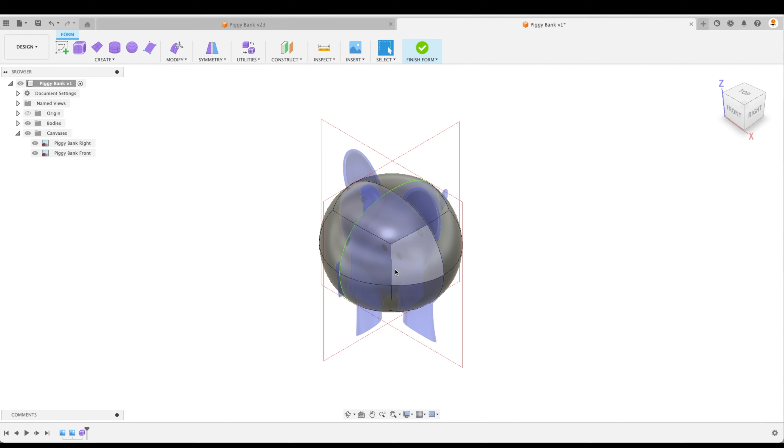Now, what's the next thing we're going to create? Well, we have an option. We could do the ears, we could do the eyes, we could do the feet. Why don't we do the feet first of all?

Now, as we look at the feet, if we go back to our original model, if we create one foot, we could actually mirror it over to the other side and then take those two front feet and mirror them to the back side of the piggy bank. So in reality, we only need to create one foot and all the other three will be created, or the pattern will be followed from that first foot.

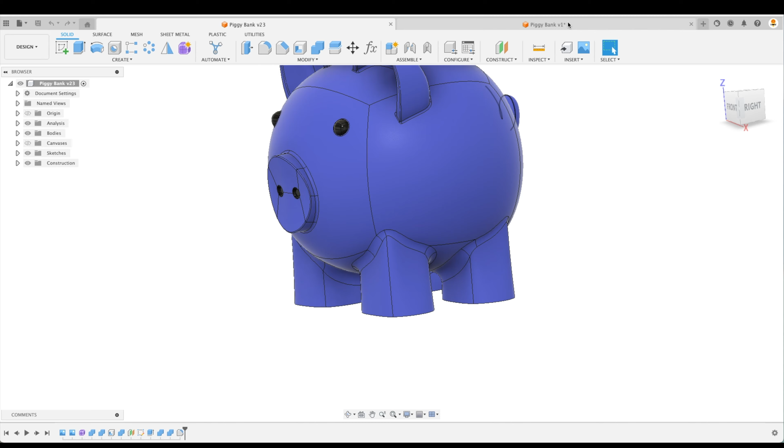So let's do that. For this, I'm going to go to the right face. As you can see here, our image was taken using a perspective shot rather than an orthographic shot. That's why the left legs are lower than the right legs. So we have to use our power of reason here, that when we're creating, things might not always line up, but we have to reason on what we're going to line up our forms with, and why. That takes a little bit of experience, but also a little bit of a thought process. Not too much - you don't have to overly think about it. Try and comprehend that our pictures or images might not always be perfect.

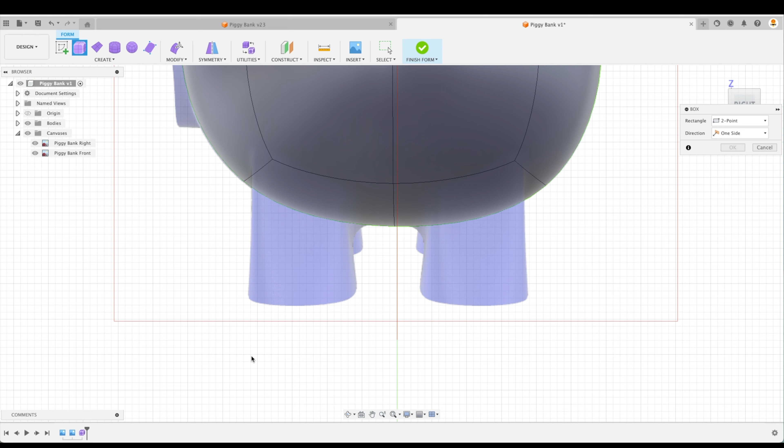So let's create our box. What I'll do here, you can create it on center or 2-point. Let's do 2-point. I'll select the bottom here and then move it up. And we're actually going to bring the box all the way up into the inside of our piggy bank. And there we have it.

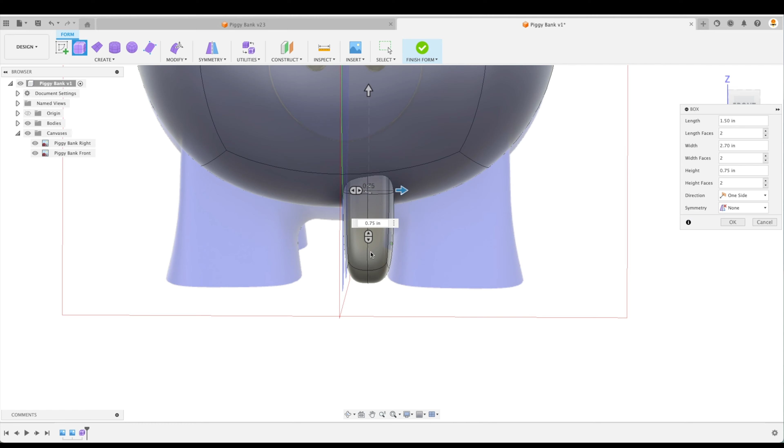Now let's keep our foot there and we're going to rotate our view cube. You can see that our foot is at the center point, or kind of at the center point of our model, where we want to move it over to the right. That's fine. Let's go OK.

Again, we can double click, right click, edit form, and we can move this into position. And then we can scale it in our X direction. So we're just going to scale it until it gets approximately in the right location. And there we have it.

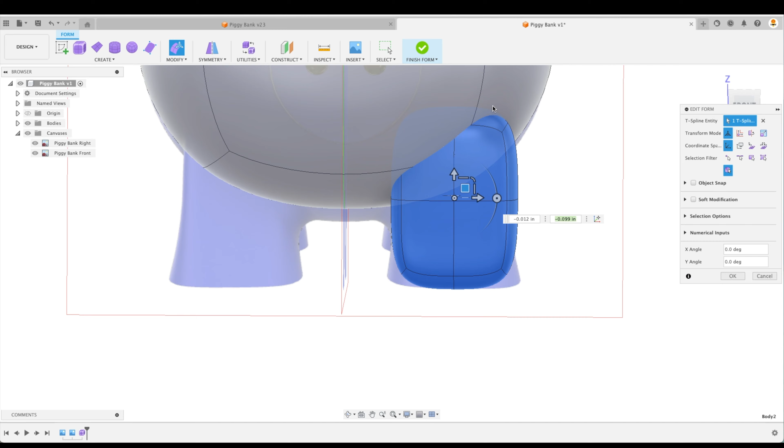Now I'd probably scale this up a little bit more in Z. There we have it. So now when we look at either our right view or our front view, that one leg is approximately in the right location. I'll bring it down a little bit too. So there we go. Okay.

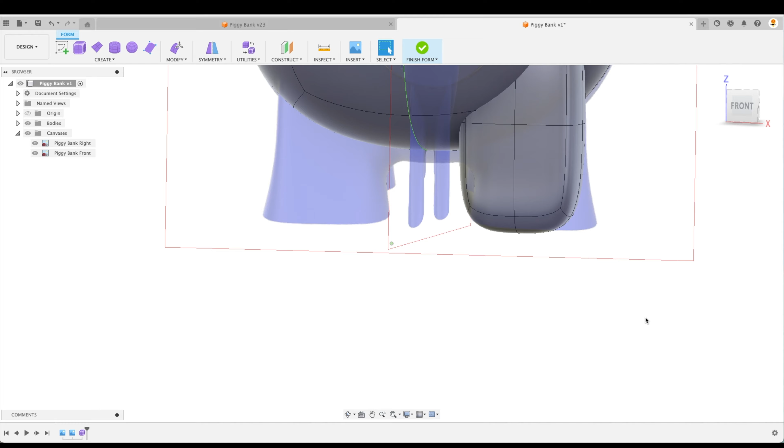Now, at this point, we're going to slowly manipulate it so that it looks like the basic shape of our foot. The first thing I notice is the shape of our feet - they're more square. This is for 3D printing. Obviously, if we're going to print it on a 3D printer, we don't want it to have a round bottom here, because it just becomes more difficult on our 3D printer. So let's try and square this off a little bit more.

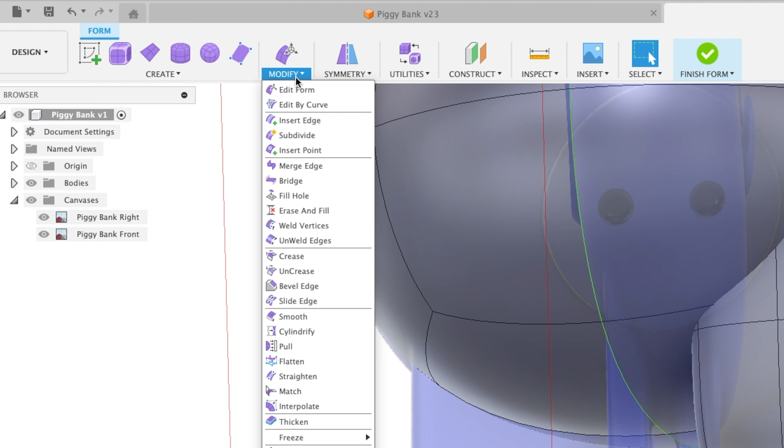Here we're going to go to Modify and select Crease. We need to pick vertices or edges, so let's pick the edges - 1, 2, 3. We'll just go around our foot here. And as you can see, we've picked all of those edges and it kind of flattens everything out, which looks great. Let's go OK.

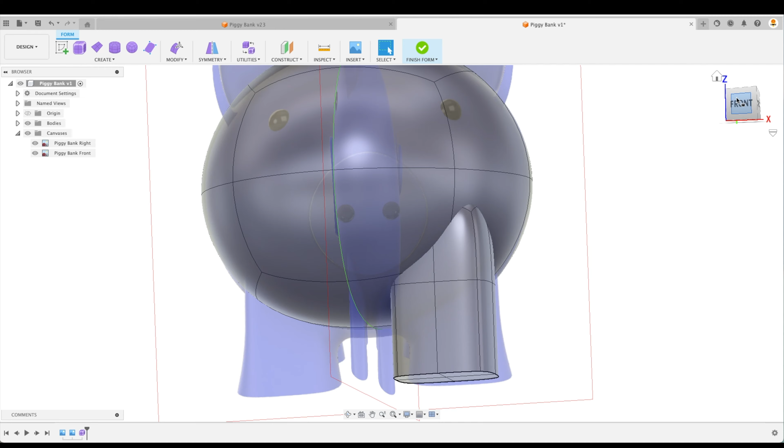Now, as you can see, if we hide our canvases while this leg is looking, well, there's much to be desired with this leg right here. So let's turn on just our right view, and let's start manipulating this to conform to the shape of our foot.

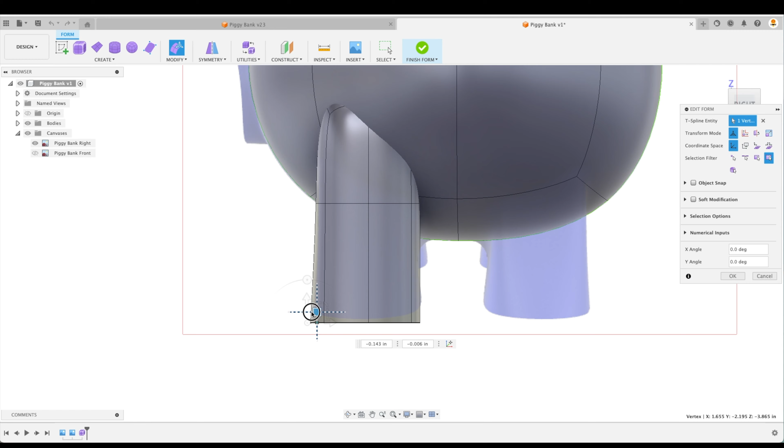Now, we can do all sorts of things here, but let's just start off with the vertice as well. Right click, edit form, and I'm going to move it out. Look what happens when I move that out - it kind of flares. That's great. Let's do the same thing over there.

And now I'm going to take the midpoints here and I'm going to try and bring them in a little bit. Let's go like that. We'll do the same thing over there. I'll move that one in. Perfect. So now we're kind of getting a little bit more of a shape here, which I like.

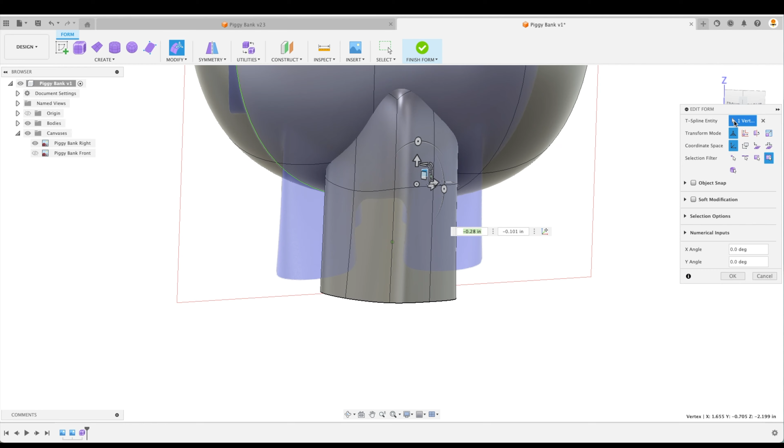Now we can rotate to the front view, and I always like actually clicking the view itself rather than it being a little bit on an angle. Just click on our face here, on our view cube face, so that it lines up perfectly. Now we can hide our right view and turn on our front, and we'll do the same thing in this direction. Great, let's do that. We can bring this edge of our foot out.

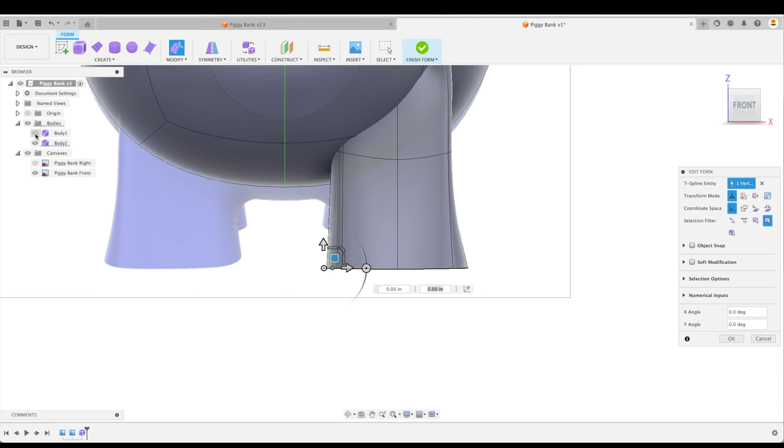We can do the same thing over here. I'm not going OK every time I make an adjustment, I just select the next entity. Now I'd like to select this vertice, but the main body is getting in the way, so let's open up the bodies in the browser and turn off body 1. Now I can get to that point easily. Let's bring in that a little bit more. Perfect.

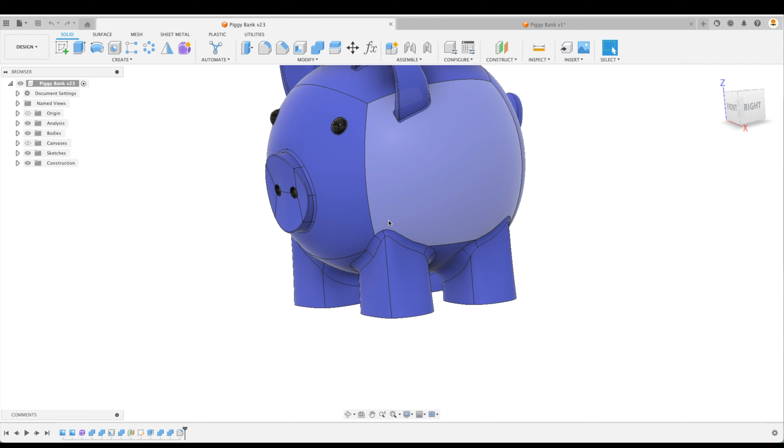So what's an issue right now? Well, this is looking a little bit terrible. We don't want this leg sticking out the front, we want it to flow a little bit more. If we look at our original model, it flows into the body better. So this is quite easy.

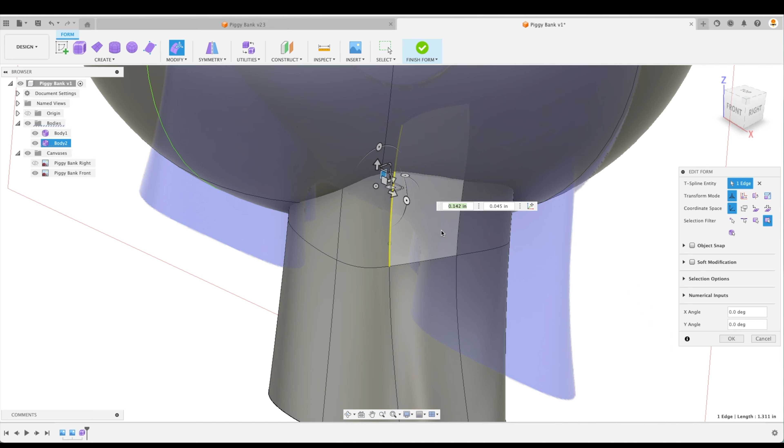We can just grab that edge, right click, edit form, and bring this in as well. Let's kind of bring that in slowly. Very nice. We can adjust different directions as well. We can bring it in this direction a little bit more, this direction. There's no right or wrong way of doing this, you just have to do it yourself and adjust it slowly so the shapes look good. So I'm going to bring that back out a little bit and the other direction in a little bit.

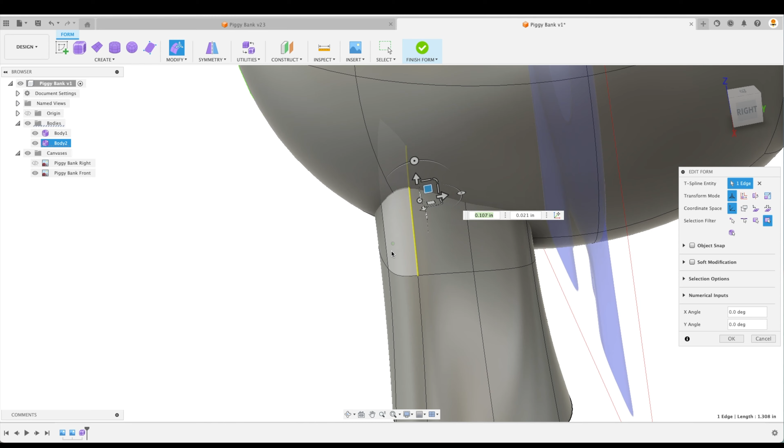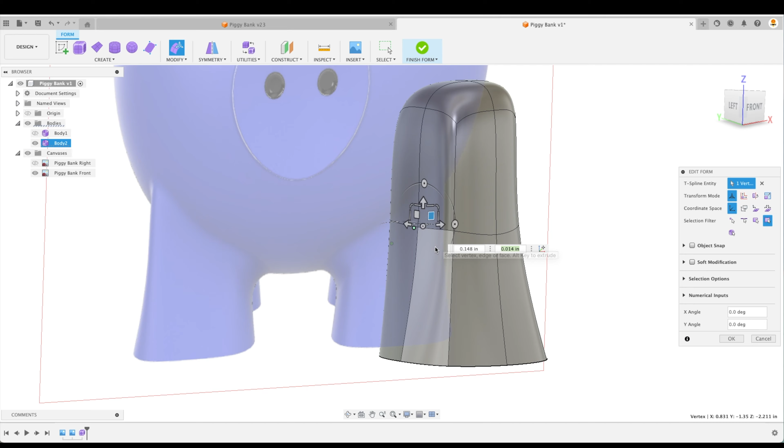Perfect. And then I'd like to probably taper this. Now I'm just doing this free form. Let's bring that in a little bit more, and let's bring in this edge a little bit more too. Great, okay, so for me that looks pretty sweet. You can see it's got some nice texture on there, it's got a little flare. I'd probably want to bring this in a little bit more too. Great, and maybe that side in just a little bit too.

Okay, so now this foot looks pretty good to me. Now I'm sure many of you can do a ton better job, but the point is to just dive in, start manipulating those T-Spline entities and see how things work. That's great. Let's go. Okay.

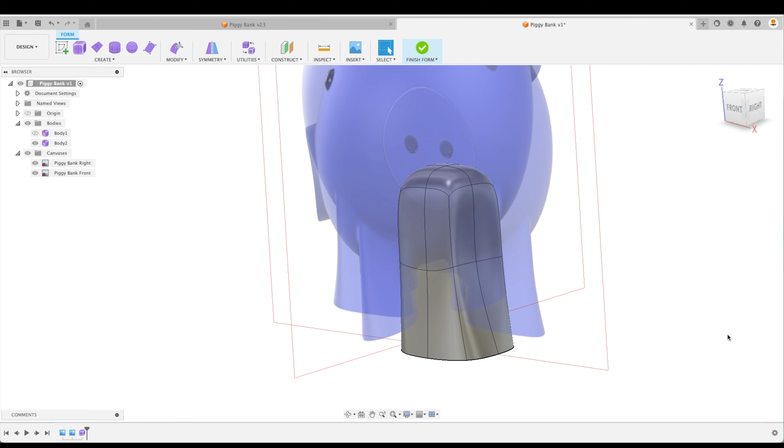Now we can activate our original body. Let's hide our canvases and we can see we've got our foot right there. Now let's start making the feet symmetrical to the other sides. So to do that, we're going to go to symmetry. The difference here is that our main body is symmetrical from the left side to the right side, this is one body, whereas our foot, we don't want to make our one body symmetrical. We're actually going to have a separate body over here with a point of symmetry.

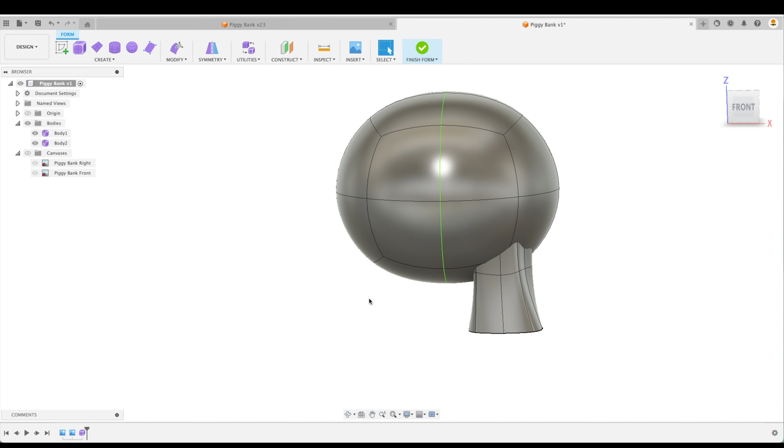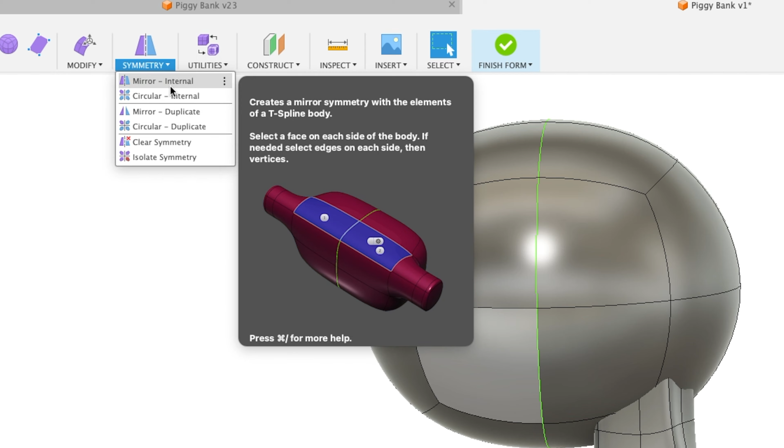So what we're going to do is go to our symmetry drop down, and we can see just that. If we go to mirror internal, how many bodies do you see in our description window? We see one body. There is one face on one side of the line of symmetry that will adjust the other face on the other side equally. Well, we don't want that. We want to go to mirror duplicate. When we look at this image here, we can see there are two bodies with a plane that we can mirror on, so let's select that.

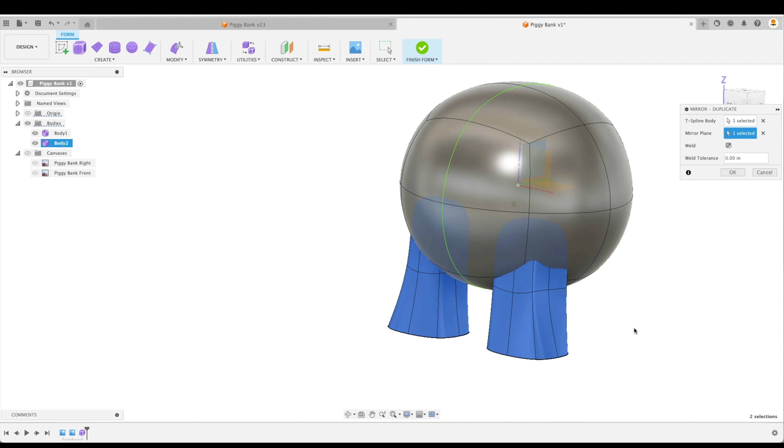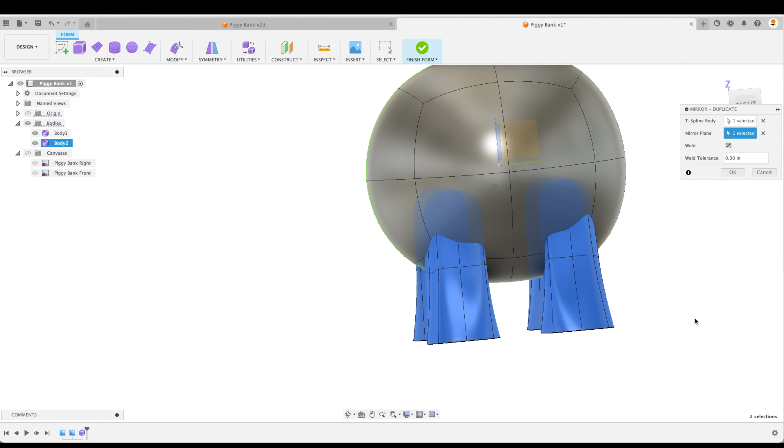Now it says select your T-spline body, so let's select our foot and our mirror plane. This will be our YZ. And look what happens, as soon as we do that, another foot is created on the right-hand side. Let's go OK. Now let's go back to mirror duplicate, and we're going to select that. By default, because they're both mirrored, our right foot mirrored to our left, it selects both of them. So now for our mirror plane, let's select our XZ, and there we go. We've got our feet on the back side of our piggy bank too.

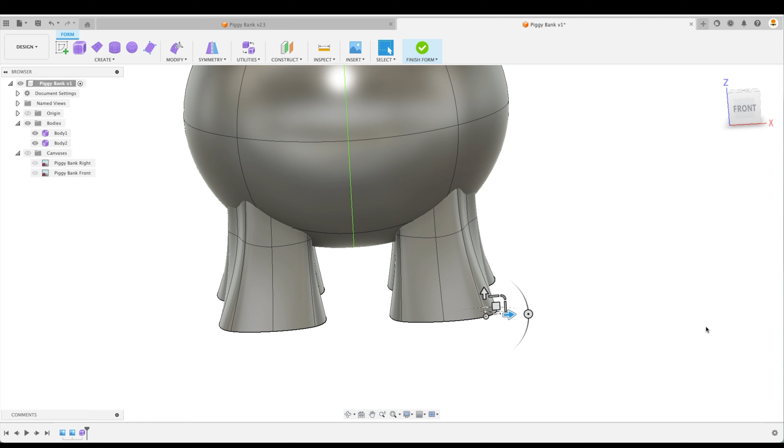So there we go. Now again, if we adjust one point here, it will adjust it on all of our feet. Let's just prove it to you. I'll pick that vertice, we'll go to modify and look at what we'll do. There we go, all four of them will adjust at the exact same time. Let's go cancel, so it goes back to default. So here we've got our feet.

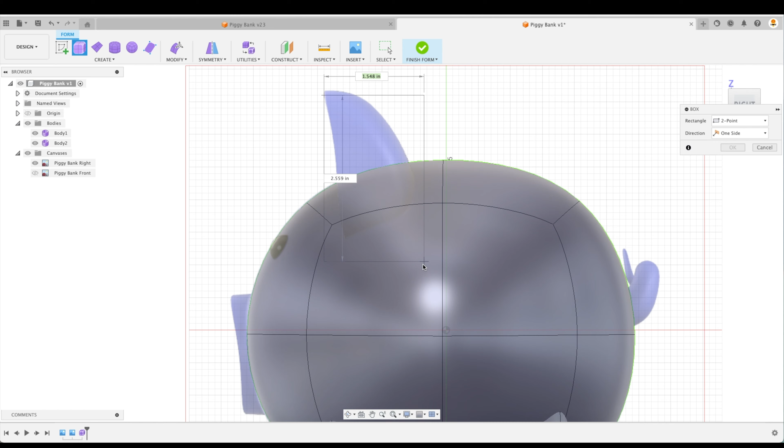Great, now let's go and create our ears. I'm going to turn back on the canvas. Let's hide the front canvas here, and we're going to create this ear shape. To do that, we will pick a box as well, two point, we'll start there and move down. We're just going to bring it down pretty far into the model and go OK.

So let's position it first of all. Again, we'll go to our front face. We'll turn on our canvas image, double click, right click, edit form. And here we can move it into place. And what I'll do is I'll do that.

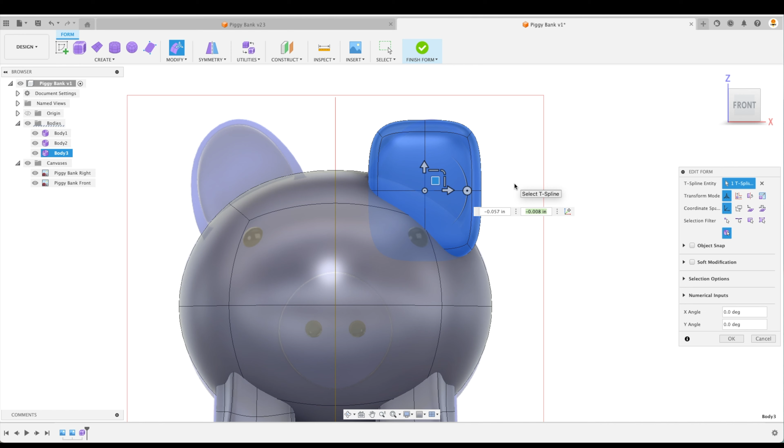I'll move the scale in X, move it out to approximately the same shape. And there we have it. So again, we can adjust all of the properties for this in order to make it the same shape as our ear. So let's do that.

Let's go OK. Now, regardless if we look at the front or the right views, we can look at our ear and you can see that it's got a kind of a sharp edge, as we call it. So I'm going to turn back on the body, and the first thing I'd like to do is crease all of these front edges.

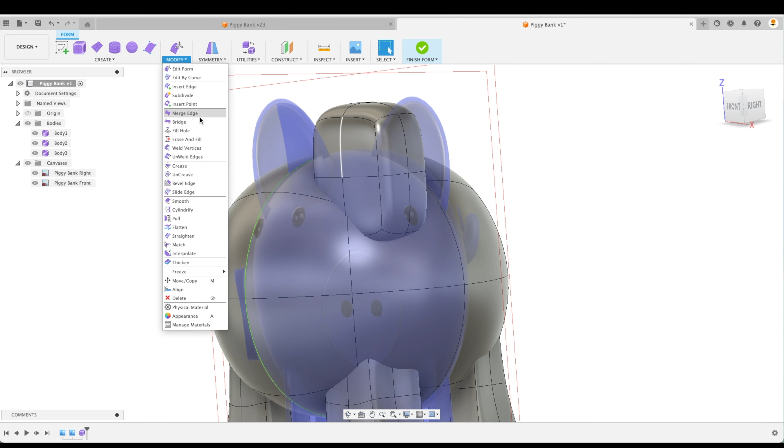Now let's do that. I'm going to go to Modify and Crease, and we can hide our first body and even our feet there. And again, I'm going to crease those edges all on the front so we can start working with those edges themselves.

This is great. Now let's turn back on our body here, and I'm going to start just manipulating the front so that it takes on the shape of our canvas image. So there we go. I'm going to select the vertice here and right-click Edit, and we can bring that in. And we'll do the same thing over here.

We can bring that out. Great. And I'm just going to work around slowly and kind of slowly manipulate those sides so that it takes on the shape of the ear. Down here too. Perfect.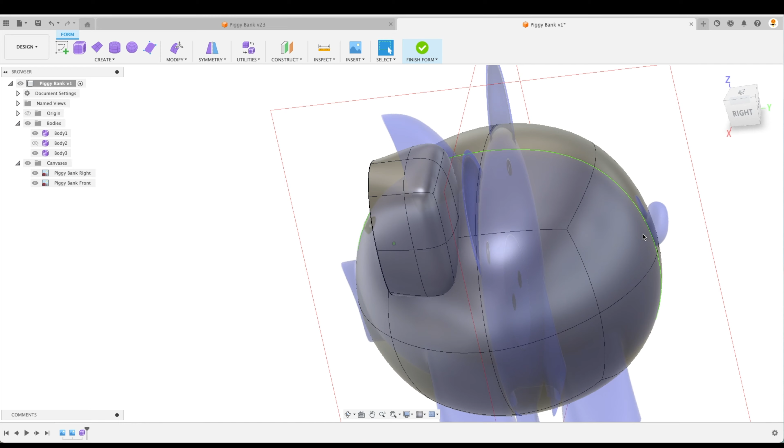So one of the problems that you see if we go OK is the shape of the ear kind of looks terrible. It starts off a little bit small and then flares out. That's okay. This is part of the process of you learning. And again, I'm not doing it perfect here, but just having fun.

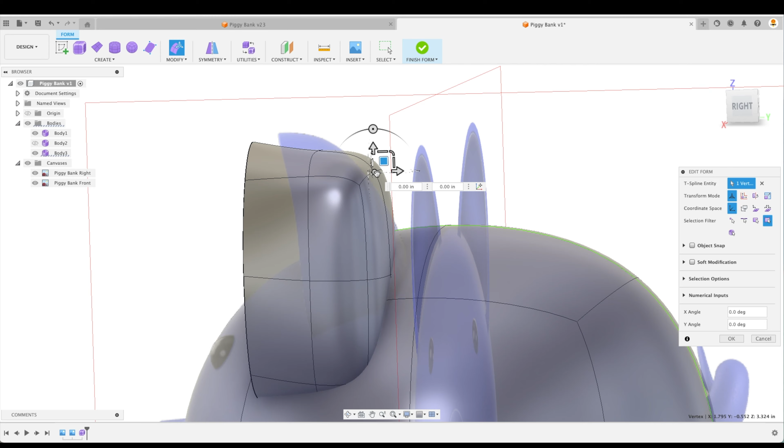Let's move that up, and then we can start moving these down. The way I'll do that is probably grab the edges rather than the vertices. There we go. And now that may not actually do the greatest job, so perhaps what I'll do is let's grab that vertice there and go back to our right view and just bring it down. And actually, we're probably going to be putting a dent in the ear there, so that's no good.

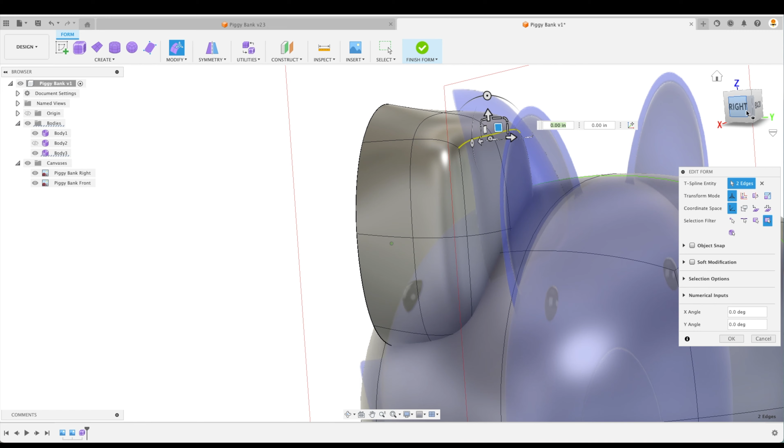What we can do is let's go back to our right view. And actually at this point, I'm going to grab these two edges. And if you want to grab more than one entity at a time, that's fine. Just hold down Control on Windows, Command on a Mac. And now we can bring that in.

There we go. Let's grab that vertice there. And again, the whole point here, the principle is to slowly manipulate it so that it takes on the basic shape of our canvas. Great.

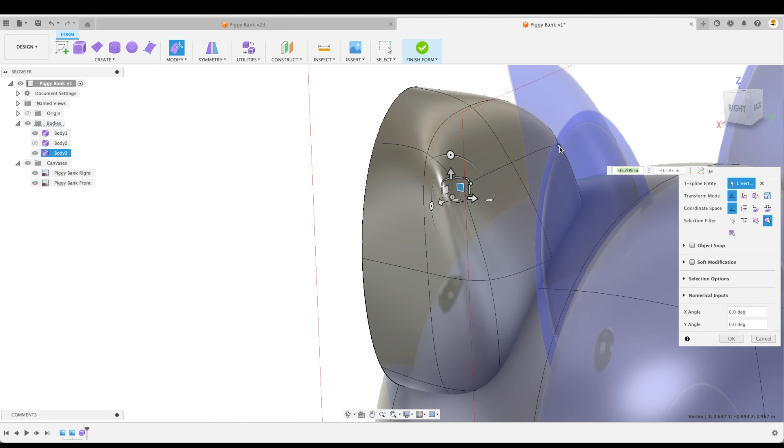Now I'm going to move that vertice in a little bit. And the other vertice, I will move that in a little bit too. There we go. Give it a little bit more natural shape. Move that point out. Perfect.

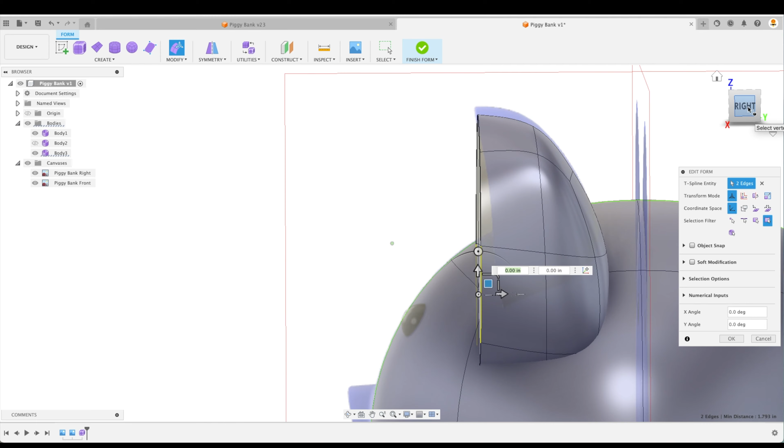Now let's try and do the front here too. So I'm going to grab this edge and the opposite edge. Selected two there. And actually what we can probably do is select the bottom two as well. I'll select all four of those, and let's go back there.

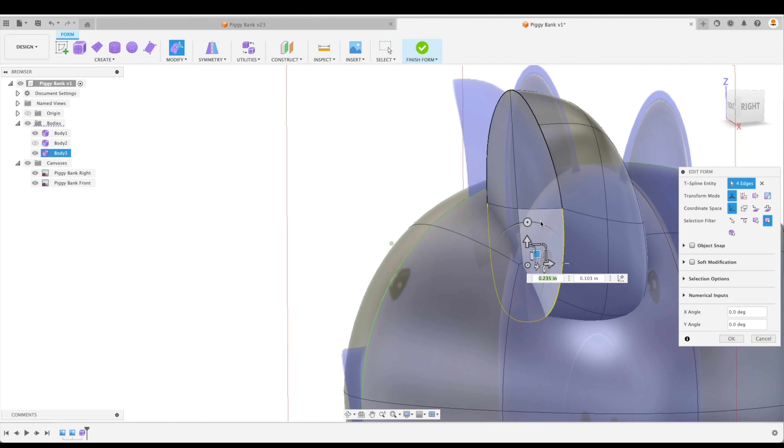And there's other tools that we can use. For example, we can use this angle at some point. But for now, let's just move it in. There we go. You can see the inside of the ear is still sticking out, so we can drag that back as well.

Great. Let's bring that in a little bit more. Perfect. Let's go back to our front face. And I don't like the way that these flare out the sides of his ear here. So let's do that. I'm going to move that part in, this part in as well. Excellent. And then this section as well. I don't like that sticking out.

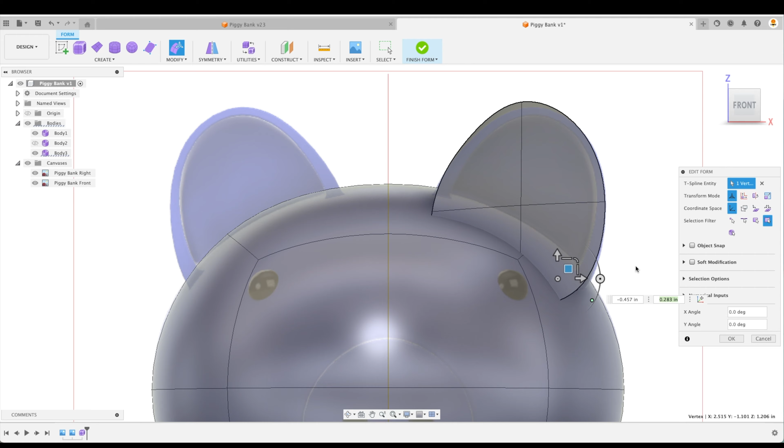Okay. All right. So you can see that we're slowly getting a better and better shape. Now this is where we refine it. We can turn off our body, turn off the canvases here, and I'd like to make this shape look a ton better. So let's just do that. I'll do it quick on the screen here.

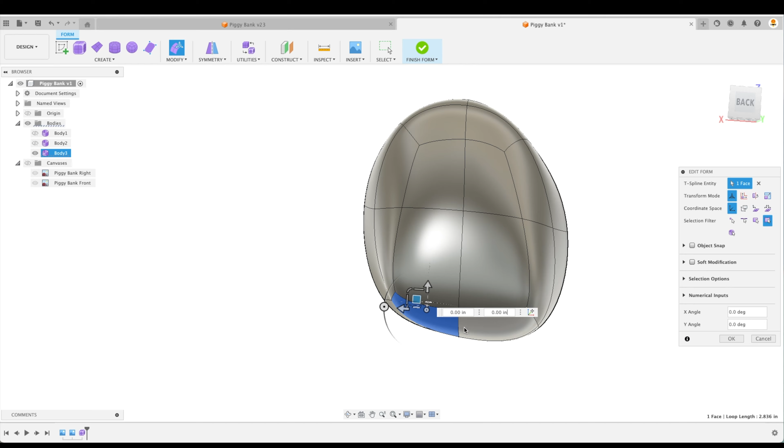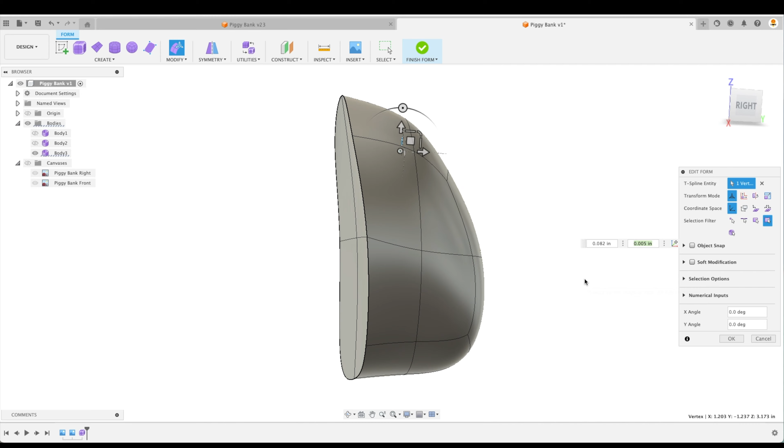All right, so we're getting into a much better shape right here. I like the way that that flows a little bit more. These faces are not too perfect, but that's okay. This is part of the fun of making it perfect. If you want, you can spend a lot of time with it, but this tutorial is not going to go into depths with that. We just want to make the basic shape here, and if it looks good to you, I'm sure it's great. So there we go, can adjust this again here. Move that in. Now I really like this shape.

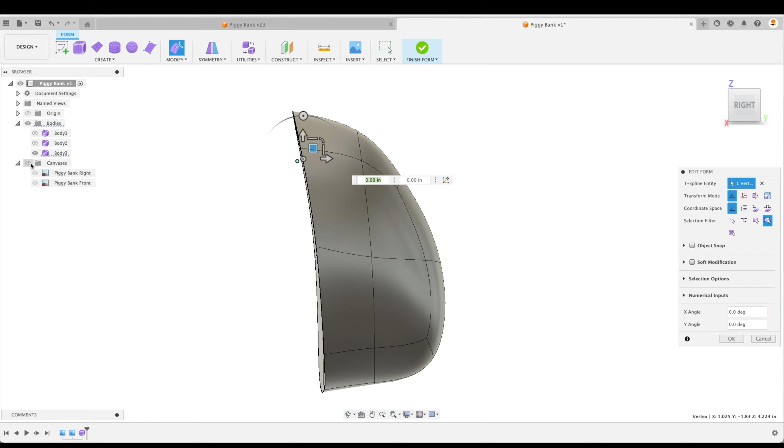Let's go to our right. We can turn back on our canvases. And I think I'm happy with the overall shape of the ear. Now, one thing we might be tempted to do is look at the shape of our ear here and think, okay, well, I need to pull the T-spline into the center of the ear in order to hollow it out.

Throughout your process of learning form and T-Spline modeling, you're going to learn all the different tools in Modify, which there are a ton of. And in learning, you will be able to use those different tools in so many different ways. You'll get used to each one at the right time. But for the sake of this tutorial, we're not even going to use those tools right now.

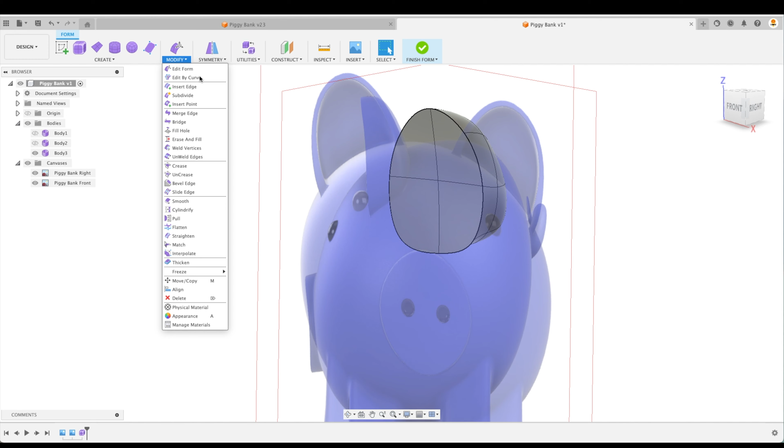We're going to hide our canvas and look what we can do. Right now it's a solid form. We're going to select these 4 faces. Again, hold down Command on a Mac or Control on a PC, and then press the Delete key, and look what happens. There we go. So now we've got a hollowed out body that we can do many things with.

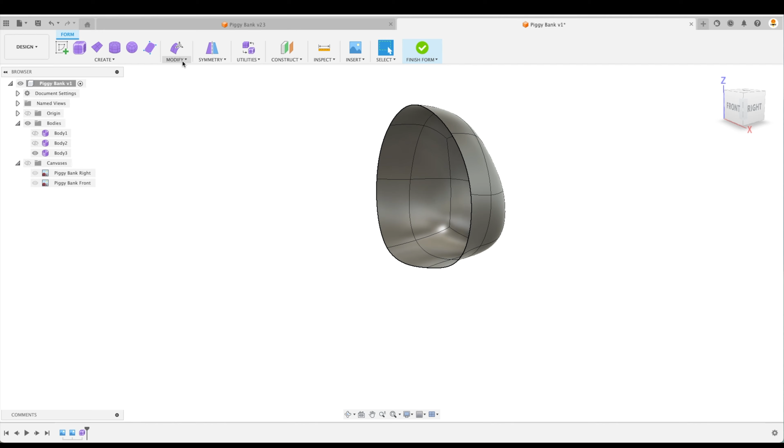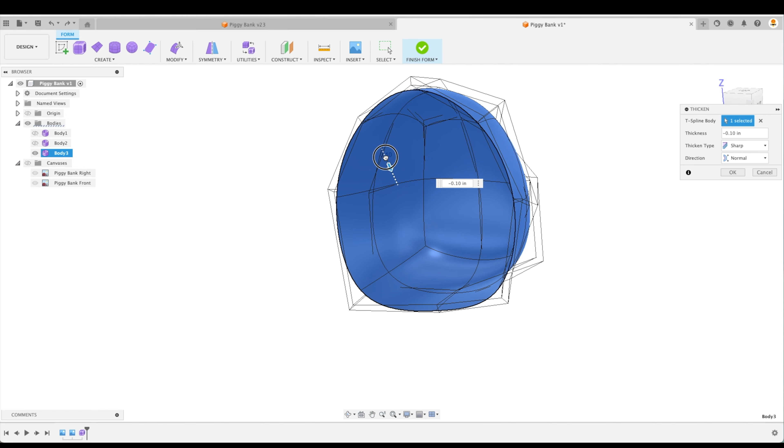The easiest way to add some volume to it with those creased front edges is to go to Modify, and then select Thicken, T-Spline body, and we're just going to add some thickness to it. There we go, maybe 0.2 to start. Let's go OK. Great, now that's a little bit too much if you ask me, so I'm going to undo. Let's go Modify, Thicken, select that body again, and I'll call it minus 0.1.

Much better. Let's turn on our original body, and now look what we've got. We've got this beautiful ear ready to be mirrored to the other side. Now, the reason why we don't mirror it to the other side originally is because it just adds more complication to the body, to our view, for our eyes in order to make good decisions about what to do next. So try and just do your one feature first, and then when you're happy with it, you can simply mirror it to the other side. So let's do that now.

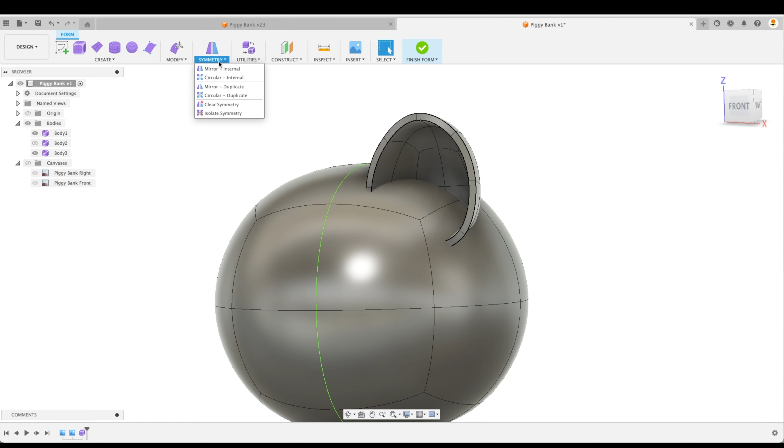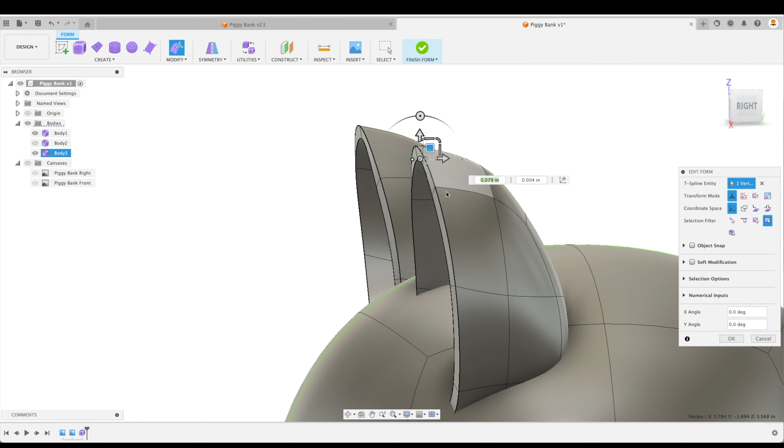Okay, perfect, our piggy bank is well underway. So you can see a couple things here. When we thickened it, the ears actually kind of bulged out from the underside, so I'm just going to adjust that real quick. We can grab that vertice, edit form, and I'm just going to pull it in. Great, and we can do that with the others as well. I'm going to select 2 at one time there, just bring it in. I kind of like the way that it adjusts its appearance or shape along the way, but we can just grab those other 2 vertices here and move it in as well. Perfect, so I like that shape a lot more.

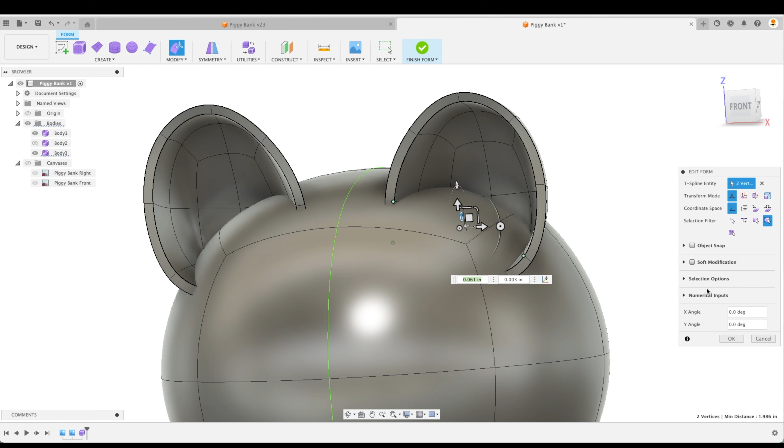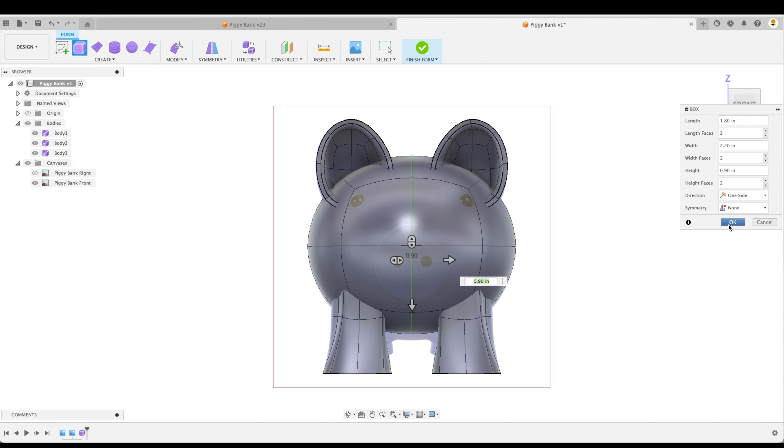Let's go OK. So now what do we have? We've got our legs, we've got our ears. This is great, let's move on to the snout. We're going to turn back on our front canvas, and we can do the exact same thing. Let's go to our box, and instead of 2 point, we'll select the center, and there we go. I'll do that. Now our body is completely hidden here, so we're going to go OK, turn off our body 1. And at this time, I'll probably hide my feet and the ears and just work with the nose itself.

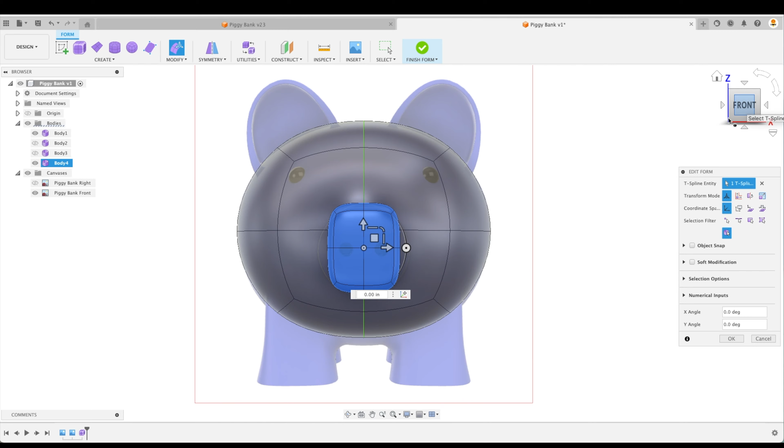Double click the nose, right click, edit form, and we can move this into place. So let's move that out first of all. Now we can make our main body visible again. Great, and let's just put this in approximately the right location that we'd like. There we go, we can turn on our other canvas. So it's a little bit big, I can shrink it down. Great, and I'm just looking at the height right now. Perfect, we can scale it up just a little bit more.

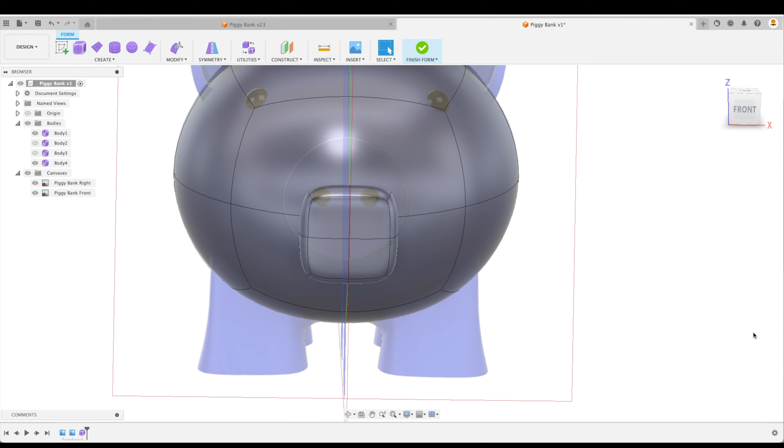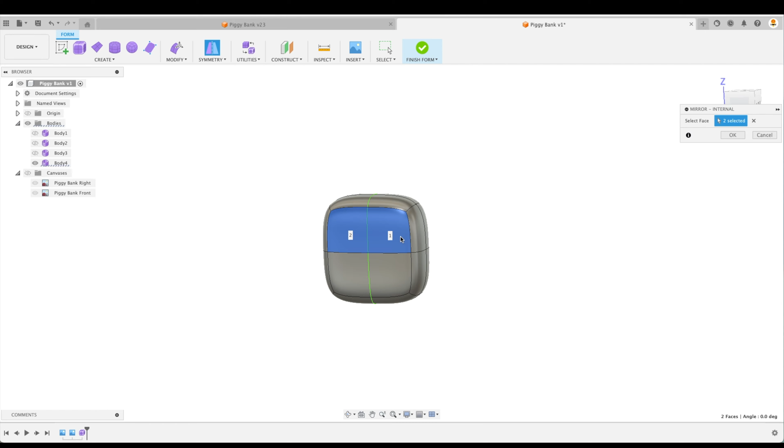Let's go OK. So here we would like the right side to be the exact same as the left side. Now we could have put symmetry on originally when we created our box, but because I forgot to do that, we're just going to do it right now. So we can go back to symmetry and mirror internal, select face. This is really cool with Fusion, we can just select one face and say we'd like it the exact same as the other. So face 1 is the same as face 2. And now we have a line of symmetry drawn down the center of our part, so now everything we do on this side will be reflected on the other side.

Now we're just going to do the exact same thing with our canvas. And I won't speak here, I'm just going to get designing.

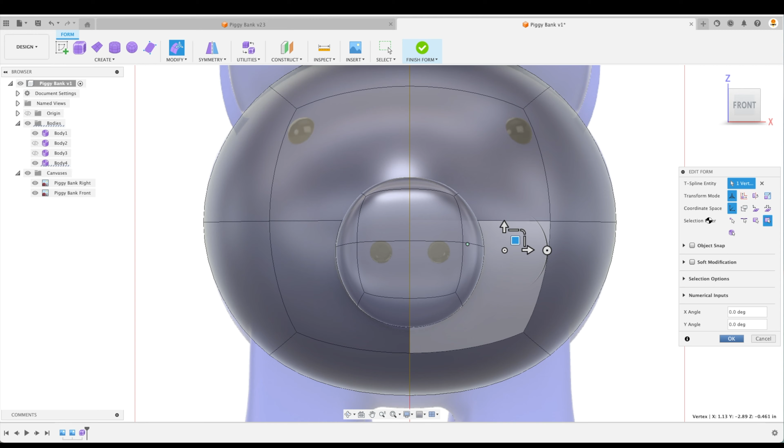Once I've got that basic shape, again, we can go back to our crease. Okay, and now we're going to use this. Obviously, I've done a poor job at the bottom here, but that's okay. This is part of the fun of design work.

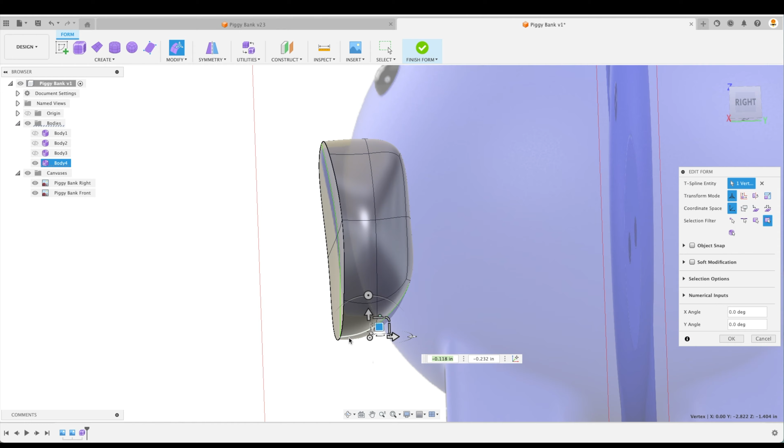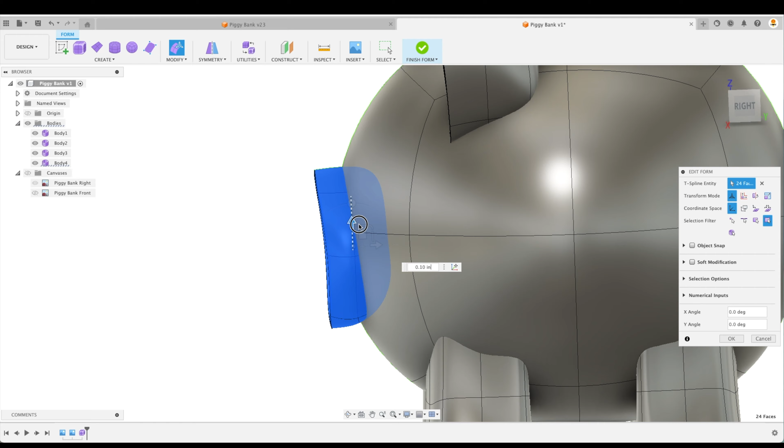Okay, I'm quite happy with that there. You can see that I inset the inside vertice a little bit, so it just gives it a little bit more shape. And again, if we don't like the position of it, we can just double click our model.

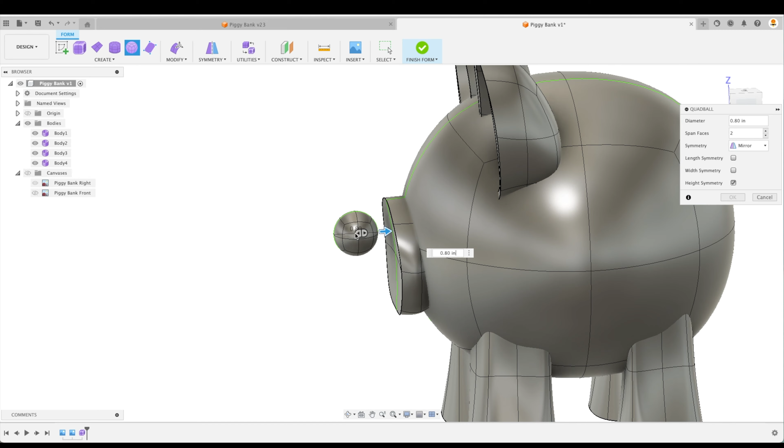We can move it up if we want, we can move it down, but I kind of like it right there. So now what we're going to do is think outside the box a little bit, and to create the nostrils, they're just going to have a little bit of an indent. For this, we don't have to create the individual indents. We can just create another quadball. Let's create it on our YZ plane, and I'm just going to create it off here. Let's do approximately the size of our nostrils that we'd like, 0.4.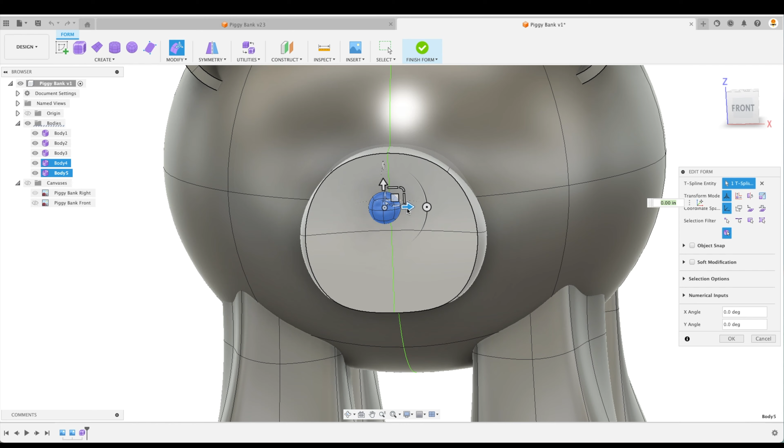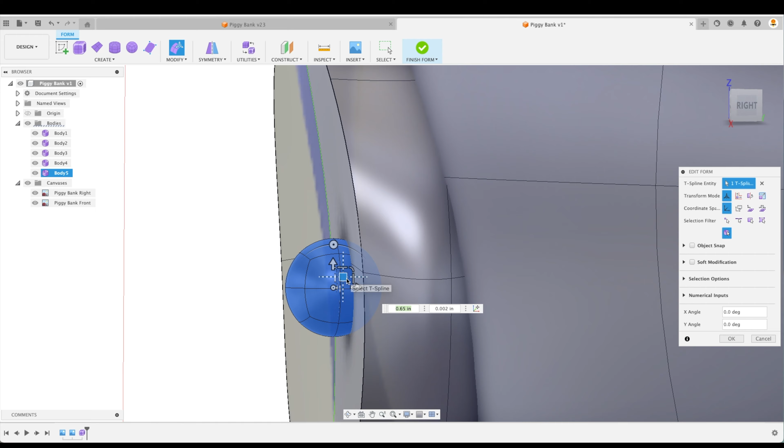That looks pretty good. We can exit or take off symmetry here. Let's go OK. And now I'm going to position this in approximately the location that the nostril is supposed to be. So let's go modify, and we can drag this into the right spot so we can look at our canvases as well. There we go. I'm going to try and put it kind of a little bit below the center point. Perfect. We'll go to the right side as well, and we can bring this in just like that. I'll try my best to keep it from plunging too deep, because we're actually going to remove this material from the nose in due time.

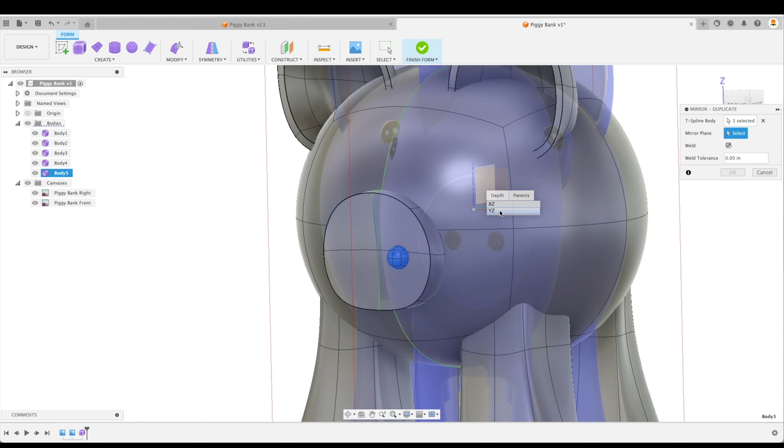So there we go, and I am just going to mirror it to the other side. So let's go symmetry, duplicate, and we're going to grab that, and our mirror plane again is going to be a YZ. Now this is just another hint I've talked about in other tutorials, but in order to select this other plane, sometimes it's a little challenging to get the right feature we're trying to select. So here, I'm just going to hold down the left mouse button until a selection menu shows up, and I can actually pick either plane there. So let's select YZ, and it puts the nostril on the other side. Remember, we are going to take these two bodies that we've created, and we are going to remove the material from the snout.

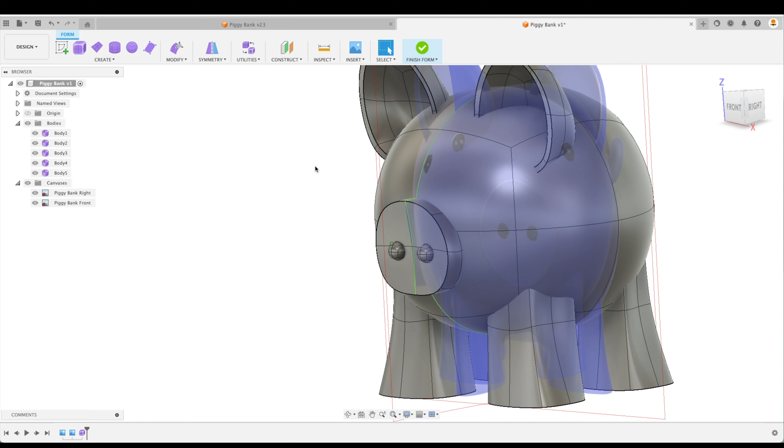Let's do the same thing with the eyes. It's the same principle here, but the eyes obviously we're not going to remove later on. We're going to keep that material protruding from the body. So let's create a quad ball. We'll select our YZ plane. We'll just create that.

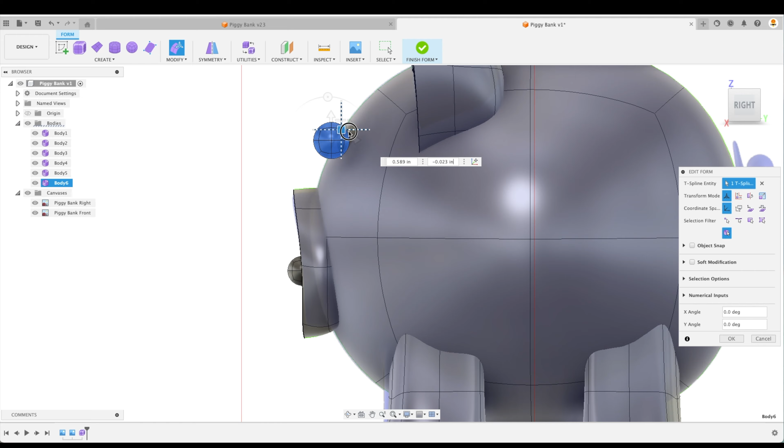Great, okay. And we can double click, edit form, and move this into approximately the right location. There, we'll go to the right face. We'll bring this in as well. Okay, so that looks about right. I wonder if it's actually connecting to the body. No, it's not actually connecting to the body. All right, that's okay. So we can go back to the front. That looks to be the right location there.

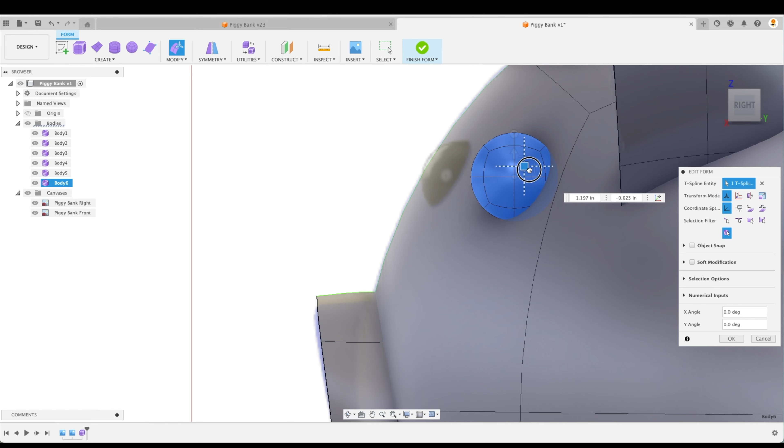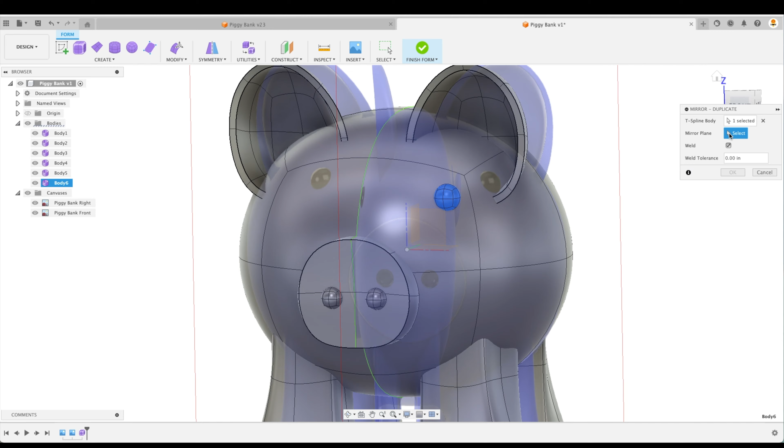All we have to do is move it now towards the part, and as we do, you can see that the part kind of envelops it a little bit. That means it's actually going to be connected to the body later on. I might just move this towards the inside just a little bit too. There we go. Now we can adjust this later on if need be. Let's just go OK for now, and we'll make it symmetrical on both sides. So symmetry, duplicate, and our mirror plane is right there.

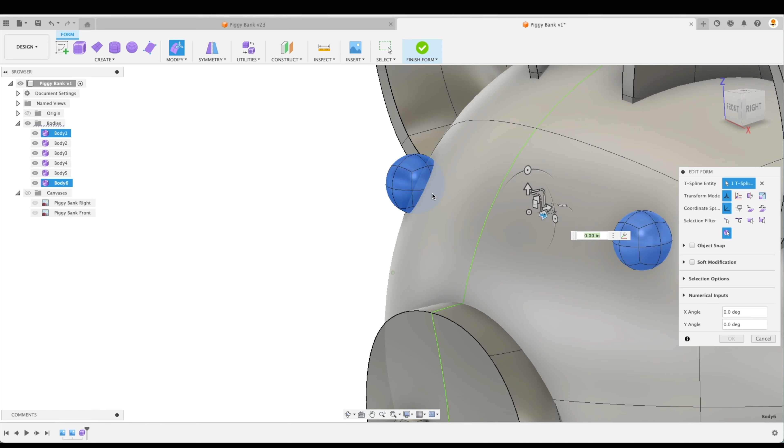Perfect. Okay, so let's hide our canvases. And here is the basic shape of our piggy bank. Now, looking at his eyes, they're really kind of bulging out there. So let's adjust it. I'm going to double click, right click, edit form, and move it just a little bit more into our main body. There we go. And because we have symmetry on, as we adjust one, the other side moves correspondingly.